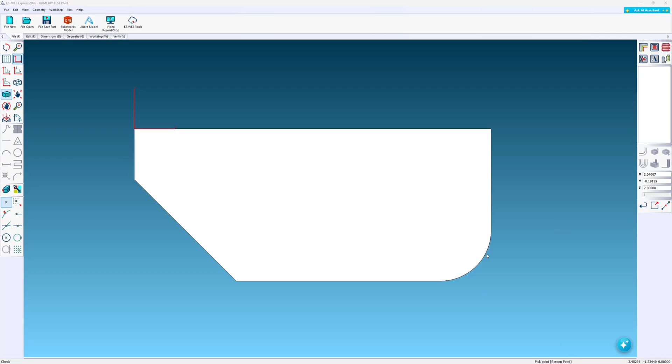This is probably the correct orientation for machining this fillet and the tapered surface here. That is one setup. Then you'd have to close EZ-MILL Express and then open a new document and machine the pocket and the countersinks on their separate program. Then you would have to create another setup for countersinking the holes.

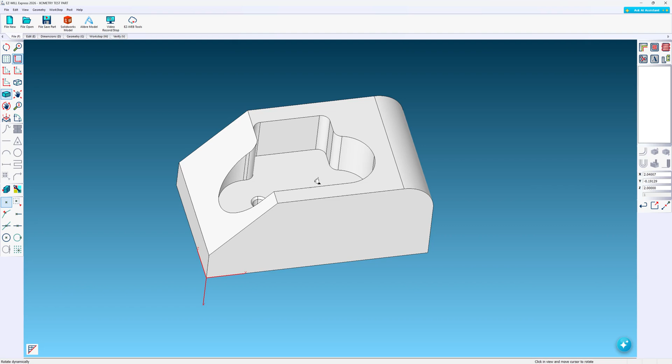So let's stay in this orientation. I could easily move our coordinate system up to the top. I'm going to show you another method. It's called World on Geometry, UCS on Geometry. You can see as I hover my cursor, you have different options. I'm just going to borrow this one for an example. Now, if I was pleased with the location, I could just hit Original.

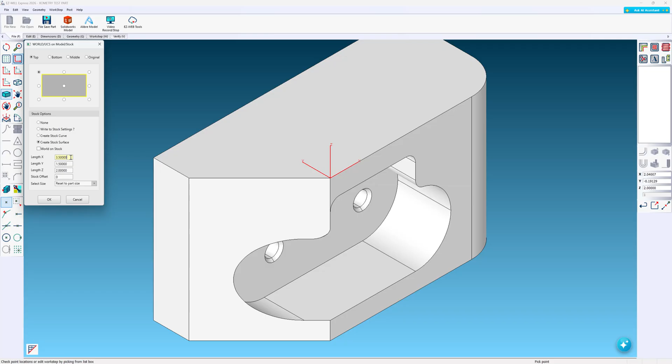But I'm going to pick one of the 9 standard locations, top left corner. And we're going to create the stock surface. This is the block size. I'm going to assume that this block has been finished to size. There's our new placement. And here in gray, you can see our stock.

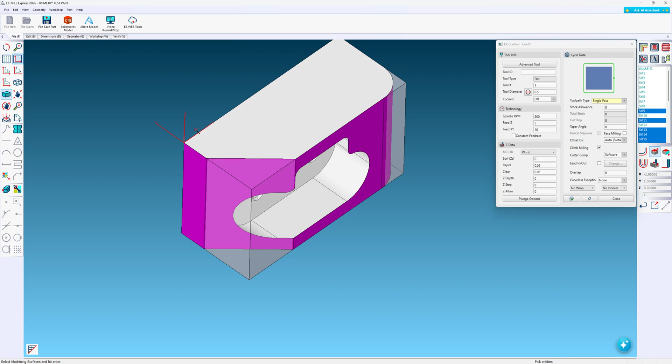We're going to create a contour operation. SmartClick is active. I click on one face, it changes all the faces that make up that contour. Now that'd be fine. If the block was oversized, you get a nice cleanup pass. I'm just going to click on the screen to clear my selection.

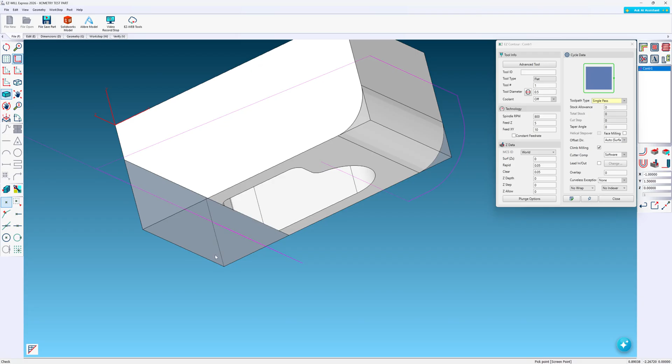Let's go and hit the shift key. That turns off SmartClick and I can pick individual faces. I'm going to pick those two there and we'll just verify. So you can see we're getting heavy material here. The tool would leave. Let's just demonstrate that. Leaves material. We should be cutting outside and working our way in.

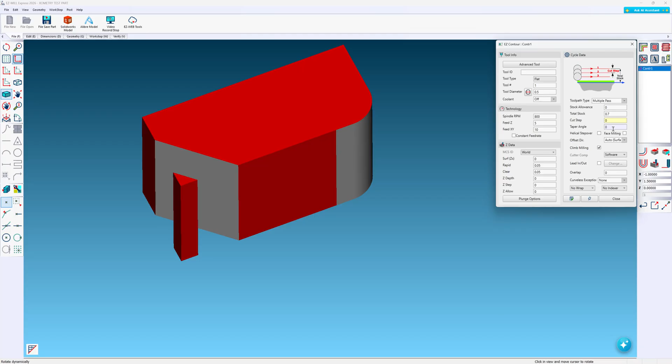So what we'll do there is we'll go to multi-pass. Total stock, I'm going to exaggerate that by 0.7. And a cut step. You can go full depth with your end mill and use a shallow cut step. I'm going to use 50 thousandths. Verify that. Now it's not practical. You're going to have a lot of air cutting here.

So the way around that, now we created our stock. So I'm just going to include that as a check surface. I'm going to use SmartClick, turn the shift key. I like to keep it active at all times. And EZCAM trims the toolpath.

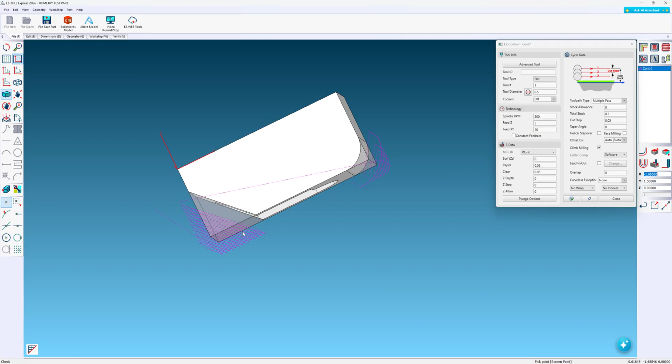If you want, you can use Helical Stepover. So now you're not wrapping out of the part and stepping over to always climb mill or conventional mill. This just zigzags back and forth, cutting up to the wall. Very efficient. Let's verify that.

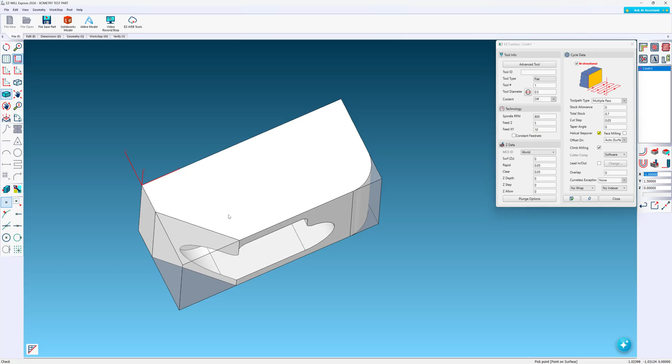So as I mentioned, that's one setup, and you would have to open a new document to machine this side. I'm going to show you how to machine this side in one setup. That'll include the taper angle and the fillet. So I'm going to go back to UCS on geometry. If I hover my cursor, you get the tooltip.

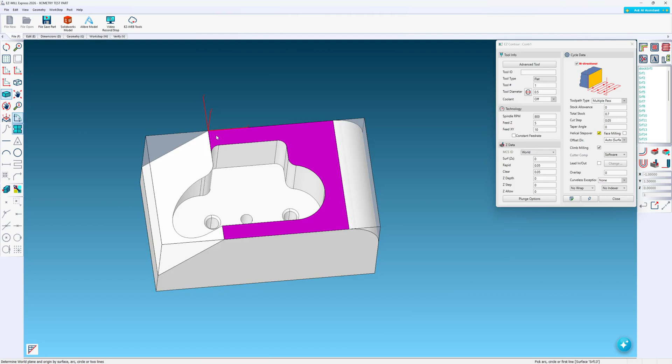And we're going to place it right here. Upper left-hand corner. I'm going to close this. I'm going to actually delete it. If you go to the list box over here on the right click, you can delete. Now I'm going to go to contour.

I'm going to select this tapered face. EZCAM detects that it's a 45-degree angle, does that for me automatically. I can use a chamfer tool and take a couple swipes down until it reaches the bottom. You could use a bullnose tool or a ball nose tool.

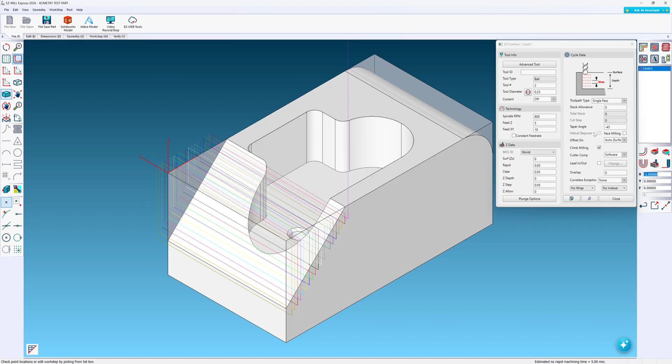I'm going to use a 1/4 inch ball nose tool, and if you look at the tool type, it's flat. So we go to advanced tool, just change that over to ball. Now to get the tool path, EZCAM automatically knows the top and the bottom and any stock from those 2 points. So I'll put in a small step, maybe 50 thousandths. Verify.

I'll leave a stock allowance up against the wall. Now I could be using a flat end mill for that as well. I'm going to use multiple pass, total stock. Like I said, it automatically knew from this point to this point that there's stock in between when you're using multiple passes. So I'm going to just add a cut step, 0.2, verify. So now you can see it's machining in layers,

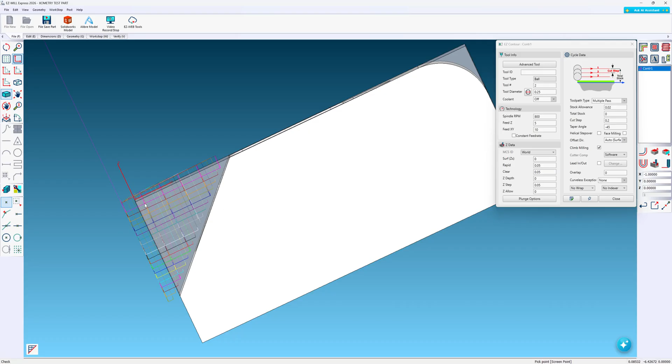0.2, and it keeps stepping down. So it's coming from outside the part up against the wall. Now in a case like that, you're probably going to want to go with a flat end mill. I'll just change this back to the 1/2 inch. Tool number 1. There's our stair step. So you can get away with stronger depth of cut and stronger step over.

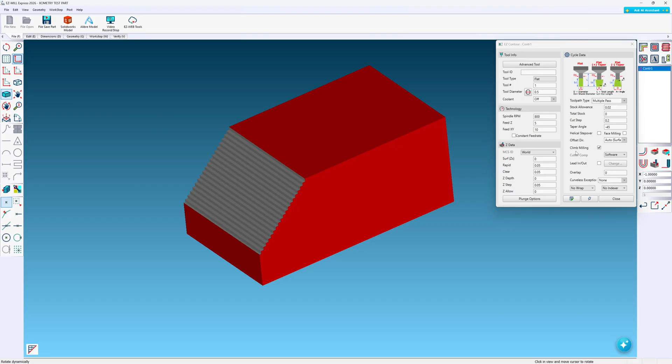So now that that's been roughed, I'm going to create a new contour to that face. Now I'll apply our ball end mill.

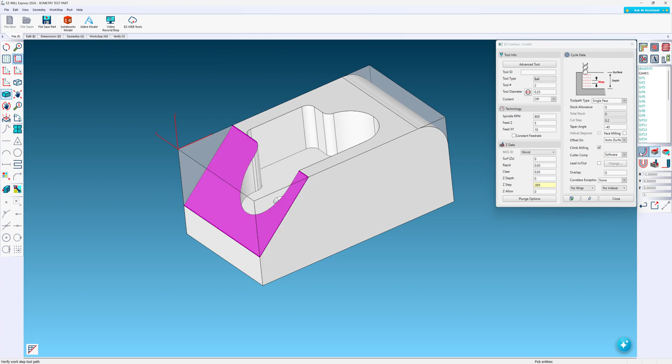Now we don't need a multiple pass, and we don't need the stock allowance. We're going to finish to size. Our step will be much smaller; I'll use 5 thousandths. Now it's wrapping over. It's not always going to be climb milling.

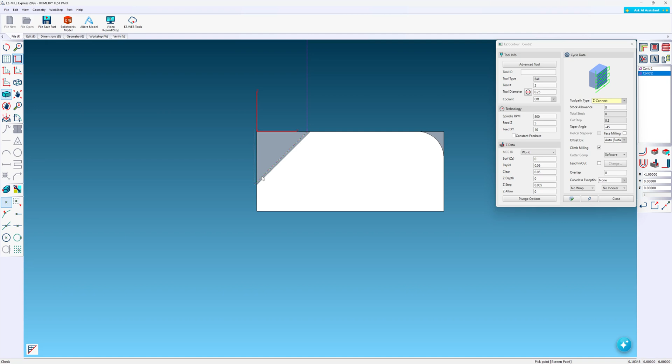So what we'll use instead is we'll go to Z-Connect. So now it zigzags down to depth. Now if I look at a side view, the ball end mill is tangent to this, or actually stops at the tip. There'll be a ball end mill here, so you'll get a cusp at the bottom. Let's take a look at what that looks like. You can see it here.

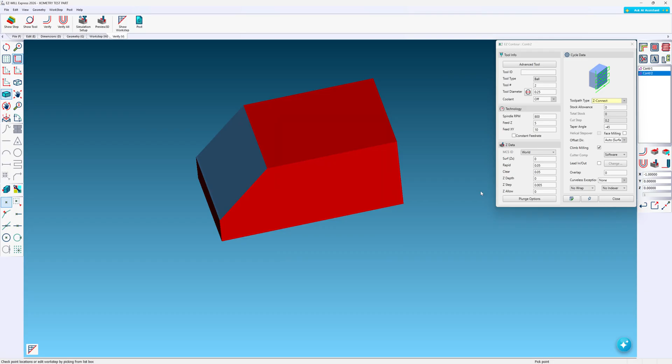Maybe one of the better options is to go to Verify, Simulation Setup, and I'm going to click check on Create Uncut Solids. That's part compare. So now when I preview it again, you can see that lip we're getting at the bottom. No worries, we have a nice feature to take care of that.

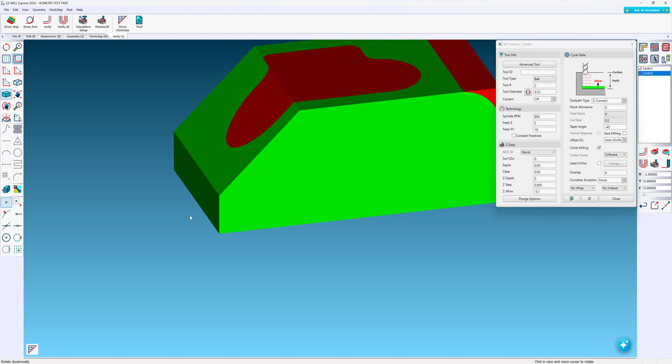We just go to the Z allow. Instead of leaving a positive value, we'll go -0.1. Verify. You can see that we get that extended toolpath. So at part compare, you can see green is cut to size, red is stock. If you had an undercut or a gouge, you would see yellow.

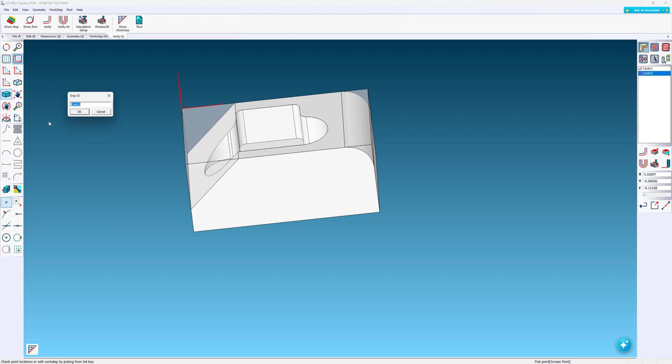Okay, now for the fillet. Now in EZMill and EZMill Pro, there are tools to handle a 3D surface or a fillet like this. I'm going to cheat. I'm going to use the contour, and I'll show you what I'm going to do with that. So by double clicking on that fillet, it gives me a diameter of 1 inch. That fillet is a 1/2 inch radius. So we'll go to contour, pick that face.

I'll use the ball end mill. Single pass with a small step. Taper angle. There must be something, so I'm going to put in 10 thousandths. Go behind the scenes. Go to cycle data. Draft options. Top fillet, 0.5. Got to give it a depth.

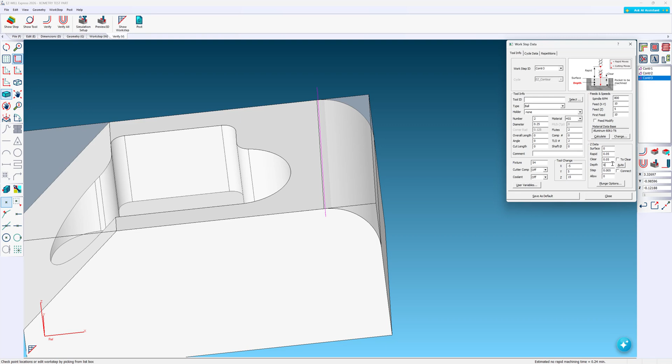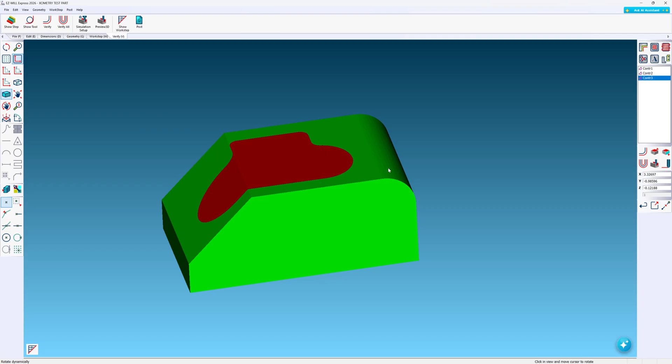There we go. So I just cheated. I made that fillet with a contour operation, so it's not a 3D feature. Preview that. That's perfect. So just enough angle. There has to be an angle associated with the fillet. And that gets you through. Now we're ready for the pocket.

Select the bottom face. We'll use a Z step of maybe 250. If I calculate my tool diameter, it's 0.27, so we'll need at least a 1/4 inch to clean up these corners in through here. So that's an automatic calculator. So this will be tool number 3, and that will be a flat end mill.

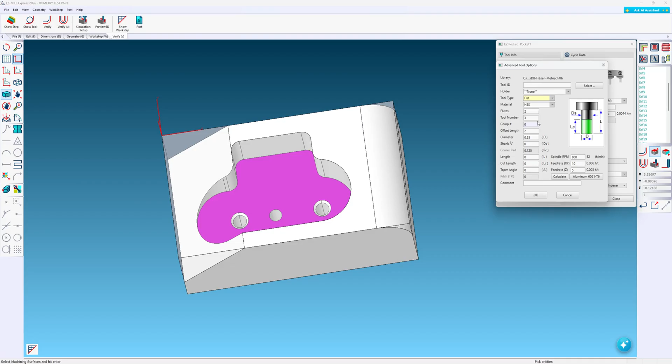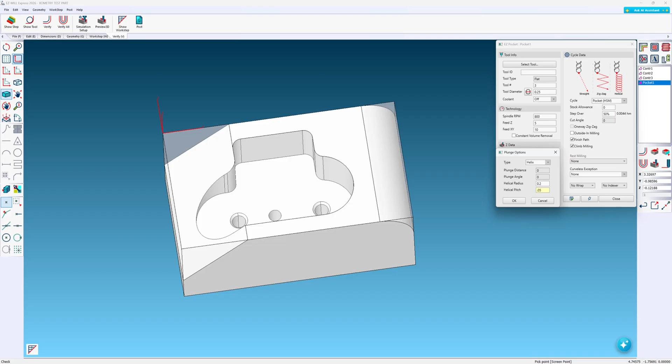Now, what I'm guessing is that the quarter-inch step down is going to be too much to just have the end mill act as a drill. So I'm going to go and add plunge options. We'll go with helix, helical radius. So I'll put in 0.2, and per revolution, let's go down and advance 50 thousandths. So as you can see here, we have our spiral down to depth.

We want to take out the depth. That should be 0. Let EZCAM determine the depth based on the surface I selected. Okay, now we need to address our holes. I'm going to select my countersink. I'm going to go to Advanced Tool. I'll use a spot drill. Diameter, let's go with 0.5. Tip angle, 82 degrees.

We'll get rid of this step and verify. Now, what happened here is EZCAM detects that taper angle and gives us the additional depth so that the tip reaches the bottom of this to generate this diameter here. The negative 0.75, if that was 0, the surface where we touched off our tools, it would feed from that point until it reached the bottom. That's a lot of air. So EZCAM detected that that pocket is where this hole should start.

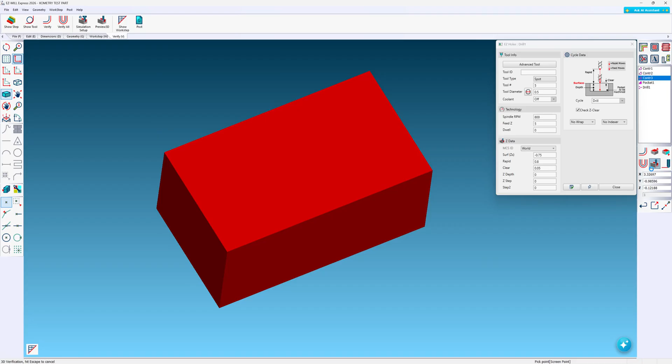Let's take a look at our preview. Perfect. Now all we need to do is drill the other 2 holes. What I mean by that is if I select one hole, EZCAM finds all the holes of the same diameter. So we select 1, 2. This will be tool number 6. Calculate my tool diameter. I'm going to change over to drill. Tip angle of 118 degrees. Verify. Preview.

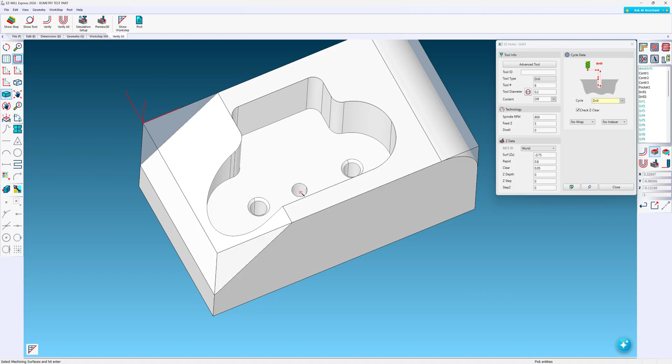Now for our one last hole. Tool 7. Verify. Preview. All right, let me go over a couple of features with you. If you want to change the order of operations, let's double click. There's our taper angle. There's our fillet right here. Let's say you want to machine the fillet first. So you highlight contour 3, use the left arrow key to move the operation up, use the right to move it down. So now that becomes the first thing that gets machined.

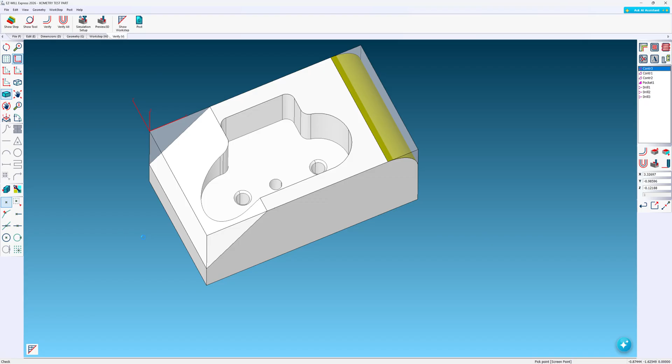Now, if I go to the lower left-hand corner, there's a button here for the work step manager. Slide this up. There's our contour 3 that we moved to the top. You can also right-click and cut and copy. You can copy work steps. You can delete them. You can sort by tool number. So let's check our tool numbers. So we have tool, bring over the diameter so you can click and drag.

So tool 2 is a 1/4 inch, and that's a ball. We have a 1/4 inch. That's tool 2. This is a flat end mill, so that's tool 3. Tool 1's our 1/2 inch. So this is a way of changing your tool numbers. So if I wanted to change this to tool 4, that gets updated in all of your operations. So anything you adjust here, you can change, like your max RPM 4000.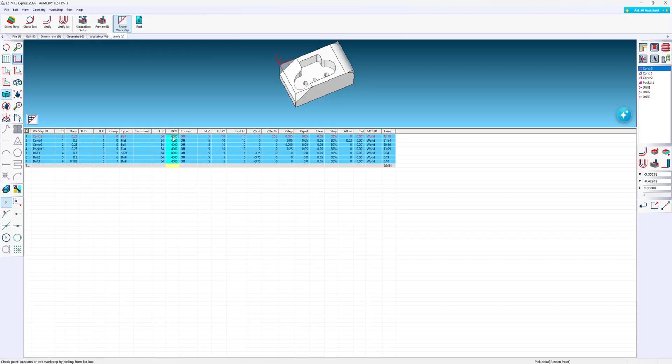Let's just click on RPM. Let's highlight this, right click, fill down. So now all of them are 4000 RPM, maxed out my machine's RPM, and change maybe your feed rates.

So, okay, well, that's the lesson I have for you today. You're ready to post process, and happy machining.